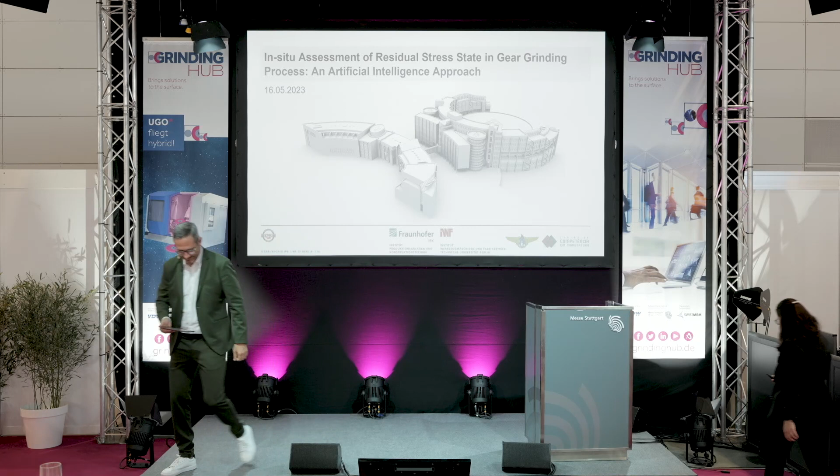Thank you very much for this opportunity. Hello everyone, my name is Carla. I'm here today to present this presentation titled In Situ Assessment of Residual Stress State in Gear Grinding Process, an Artificial Intelligence Approach.

I'm from Brazil, a research assistant there in the Aeronautical Institute of Technology. I'm here doing this research in cooperation with IWF at Technische Universität Berlin, so I'm very glad to present this topic today.

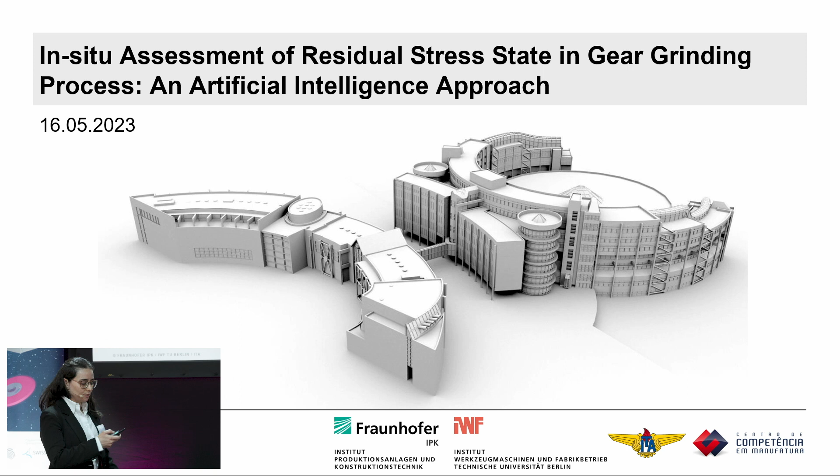This presentation will be divided into three topics. First, we will talk about the motivation of this research. Then I will explain the methodology we are using right now, and I will finish with the next steps.

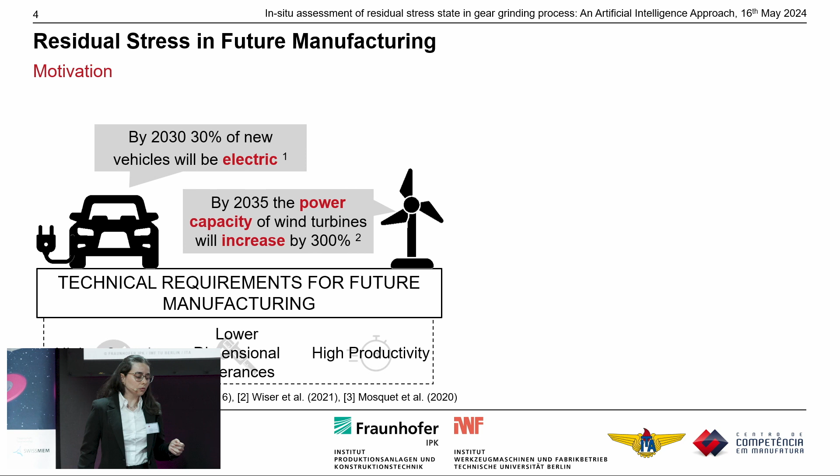This research is based on the new technical requirements we are seeing in the industry right now. We need high speeds, lower dimensional tolerances, high productivity. And this is leading to new concerns about surface, durability and reliability of mechanical components.

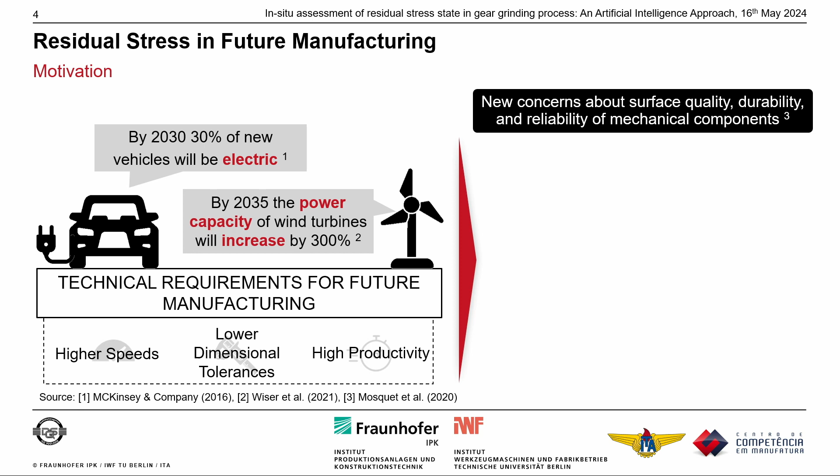My research is based on gears. When we talk about surface integrity on gears, we can highlight residual stress, because when we have different residual stress, more compressive or more tensile, it can affect the fatigue life of gears. So our idea here is using residual stress as a tool for manufacturing.

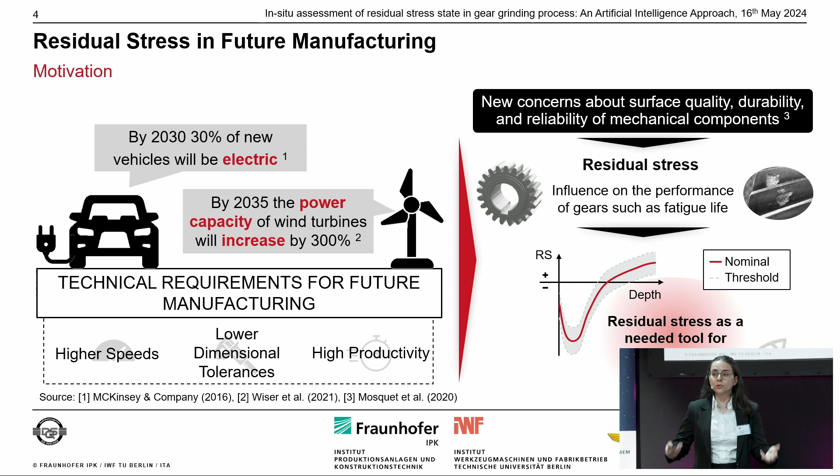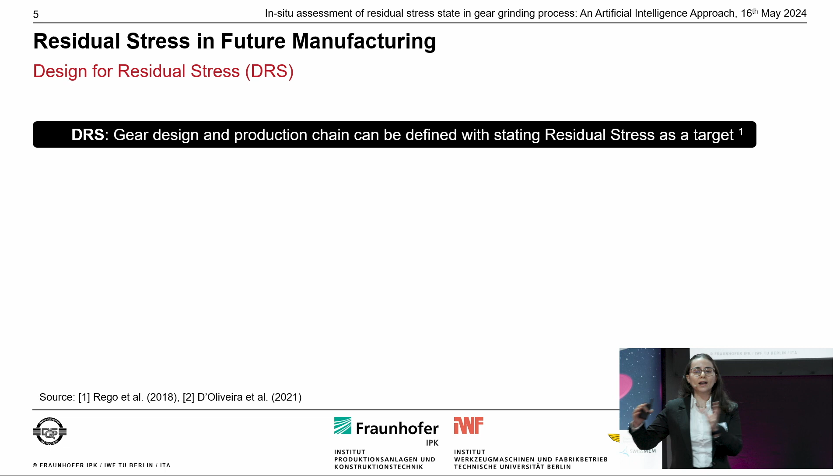This idea of using residual stress is not starting right now. It started in 2018 with this concept, named Design for Residual Stress, DRS. The idea of this concept is to design the gear and its manufacturing chain thinking about the final residual stress to enhance the fatigue life of gears.

This research started with my research group in Brazil, and they defined some major information that is important right now. The first is that the residual stress is not a product of one process only, it's a product of the whole chain. So it's important to pay attention to the residual stress at each stage of the manufacturing chain.

Also, some colleagues of mine defined some forms to predict residual stress first, because first we need to predict, then control. So we are in that moment now, how to predict that. We already have some numerical predictions working well, but they are still offline, so it's not possible to apply in industry, on the shop floor.

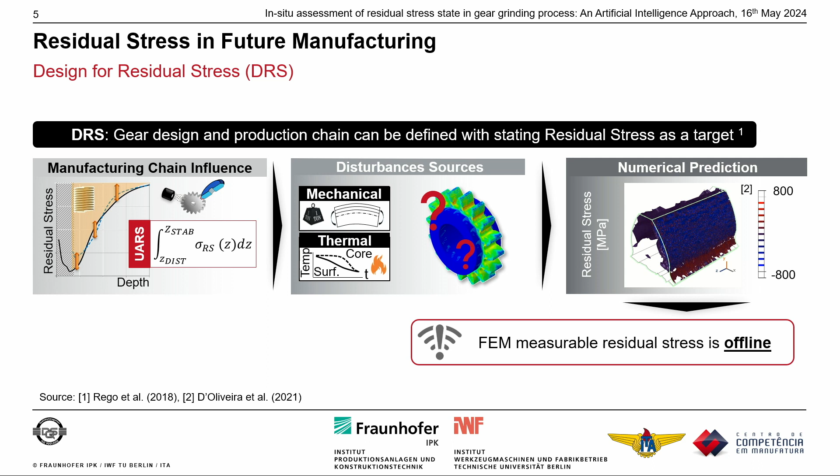So the idea of this new research we are developing together with Germany is to develop an in situ assessment of that. To do that, the first thing we have to look at is, okay, what are the ways we have right now to assess and control residual stress?

We have, for example, to assess residual stress, the X-ray diffraction technology. It's very used, but has some key challenges regarding position dependency, time consumption, and could be destructive depending on where you want to measure this residual stress. So it's not possible to be used online in a shop floor.

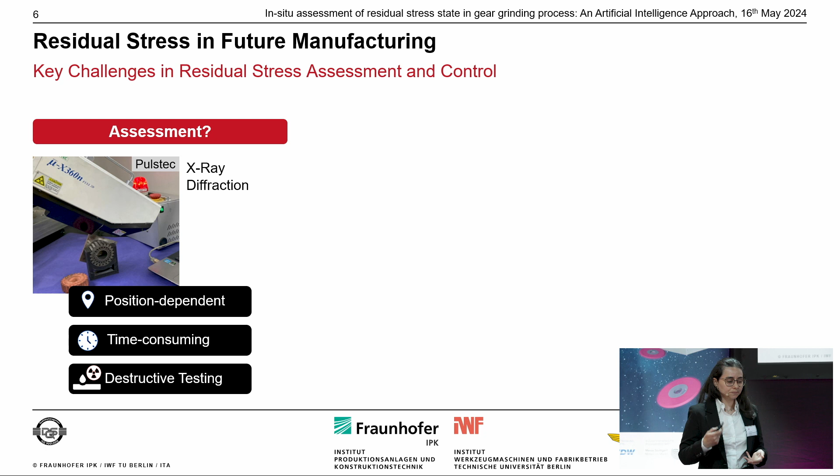Also, when we talk about control, we can use finite element models, but it's also a problem to use it online because of the time, and also because it's very limited for the boundary conditions of each model.

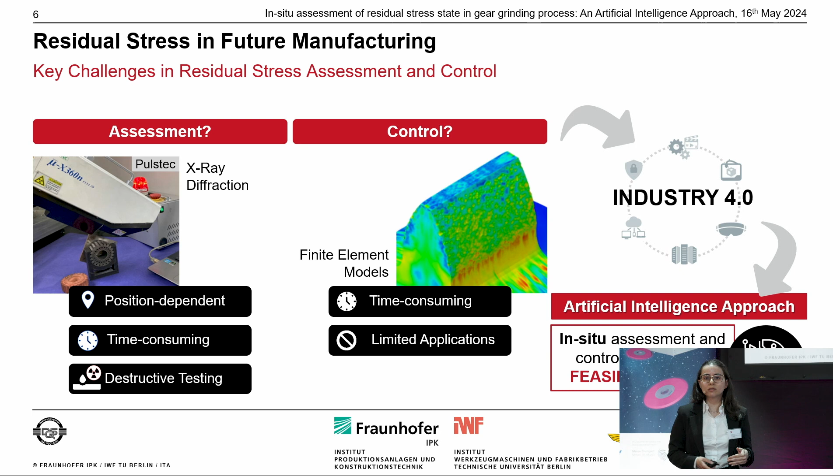So the idea now is to use new technology of Industry 4.0, for example artificial intelligence. We already researched about that, and we know it can be used for in situ assessment of other variables. So the idea now is to use that to predict residual stress in that moment.

So based on that motivation, we defined this methodology. We will apply artificial intelligence in the prediction of residual stress. The idea is to develop an in situ approach.

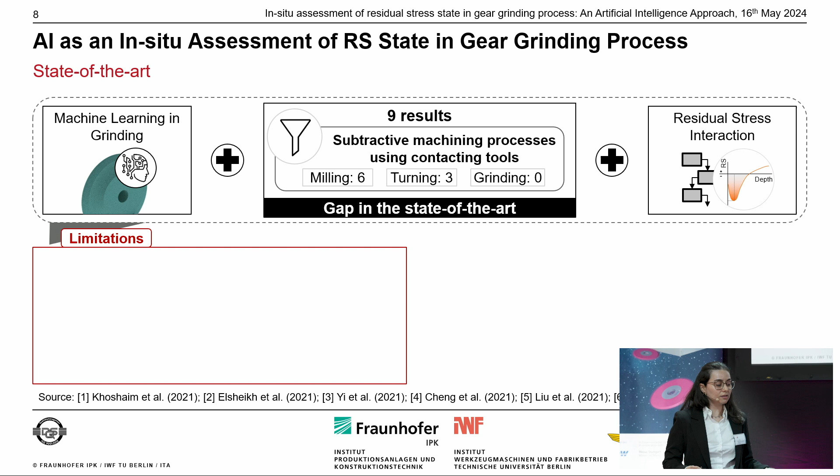So first, we started looking in the literature for what we already have about artificial intelligence in grinding. When we think about prediction of residual stress, we don't have right now any study ready. So it's a limitation we found.

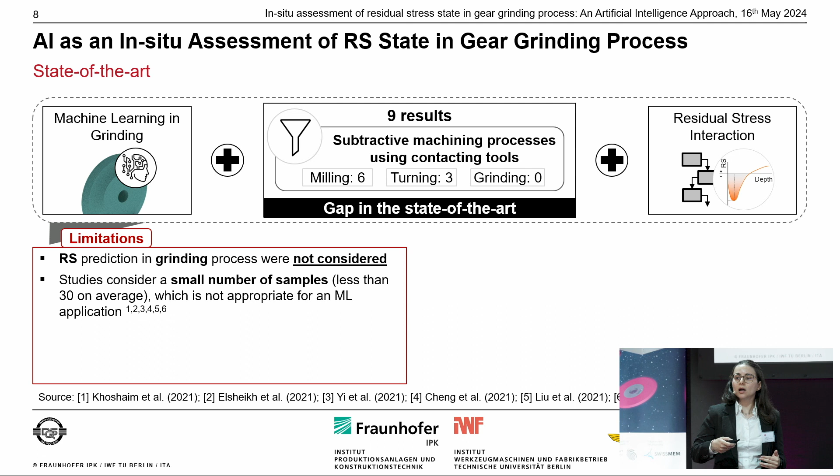So we tried to find other processes, and we found some results regarding milling and turning, but even these studies had some limitations when we think about in situ prediction.

First, they use a small number of samples, on average only 30 in the studies we found. It's not an appropriate number for machine learning application, so this is a limitation we want to fix.

The second limitation is that only one of these studies considers online process loading, which is very important for online applications. And finally, none of these studies consider the interaction—in other words, none of them consider the whole manufacturing chain or more than one pass, for example, in each process.

So now our contribution here will be focused on developing this online prediction algorithm using machine learning, and then considering this influence in the manufacturing chain.

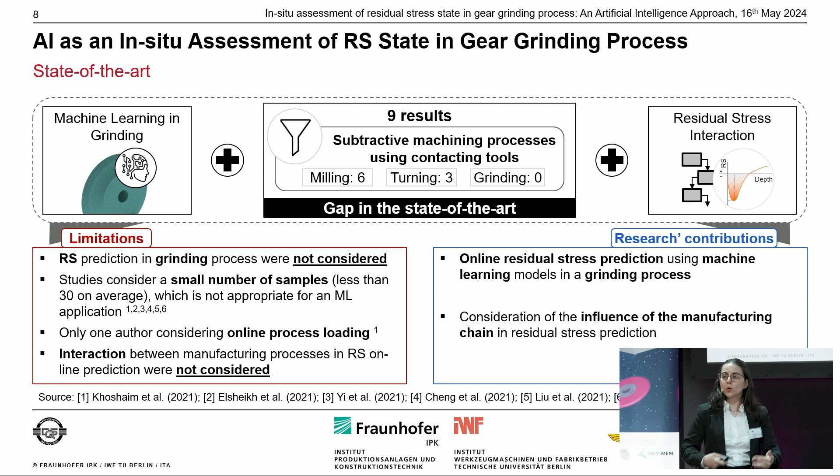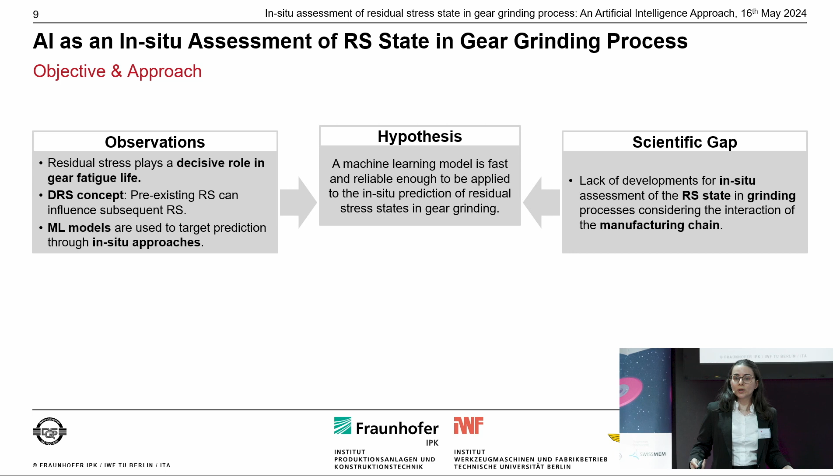Looking at all these observations and paying attention to that scientific gap, we state the hypothesis that a machine learning model can be able to predict the residual stress in the shop floor, and then we define the objective of our research: to develop and evaluate a machine learning framework to support this in situ assessment of residual stress state in gear grinding.

So you can see we chose this gear process to apply our research, because gear grinding in this case will be the last process in the manufacturing chain, so it will be possible to evaluate all the influences we will have from the other manufacturing processes in the chain.

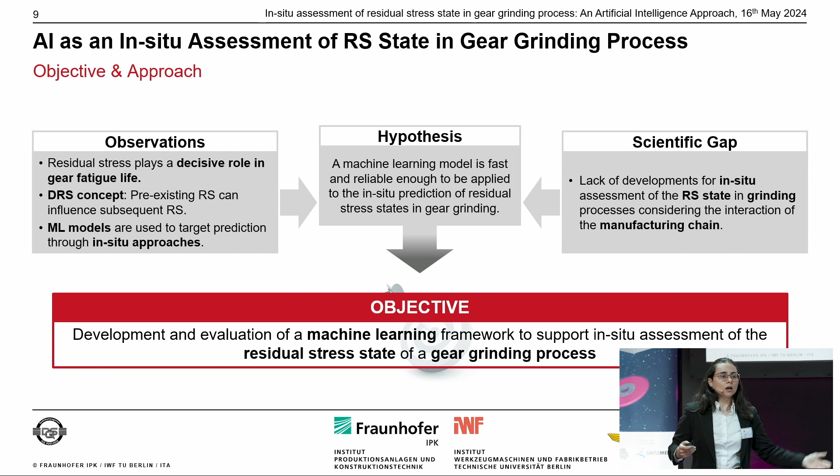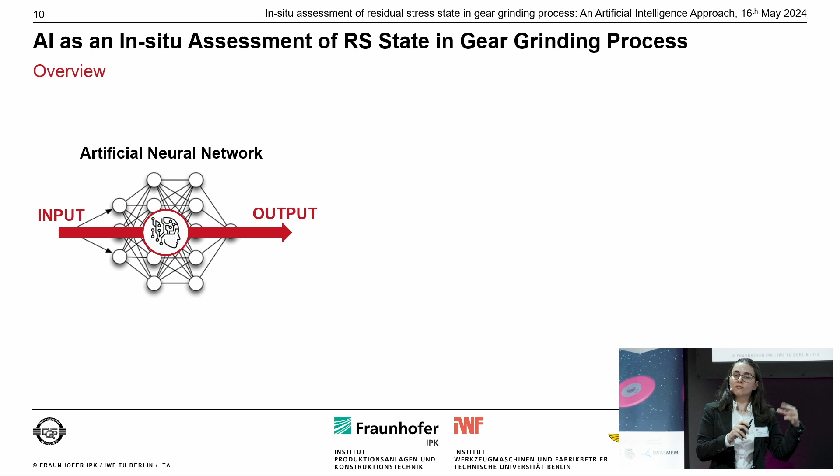So how will it work? We will use an artificial neural network to apply this. This will be the algorithm we choose, and we have to develop a database with input and output data to train this algorithm.

So we are working together with Berlin, with IWF, and we are developing a design of experiments with a lot of samples to change the process parameters. The idea is to create a lot of different residual stress states and then create a database that we can use to train that algorithm.

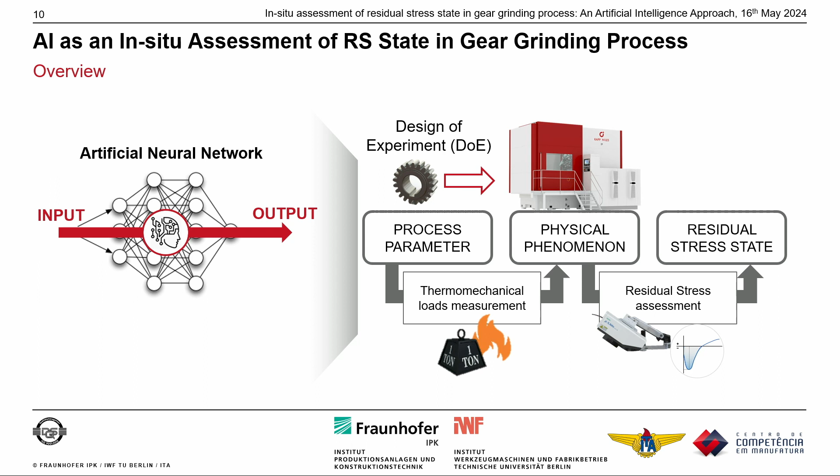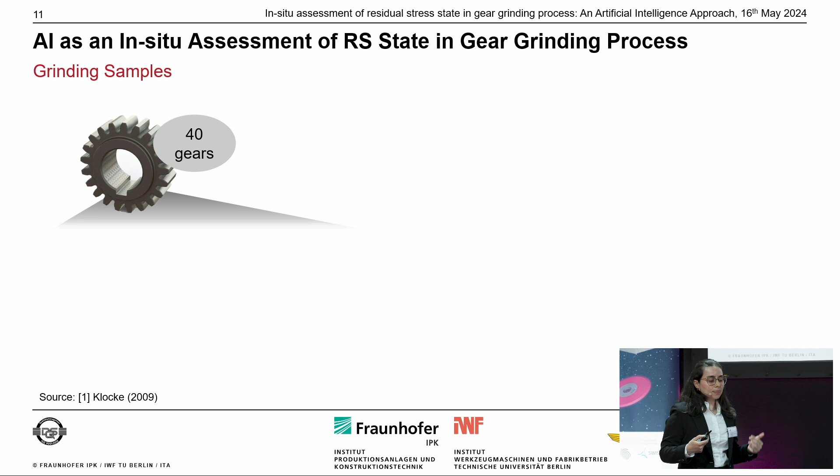So about how we will do these experiments: we will use 40 gears in the first moment, and we are doing a pre-grinding first because these gears were heat-treated, so we need to reduce the heat treatment geometry deviations.

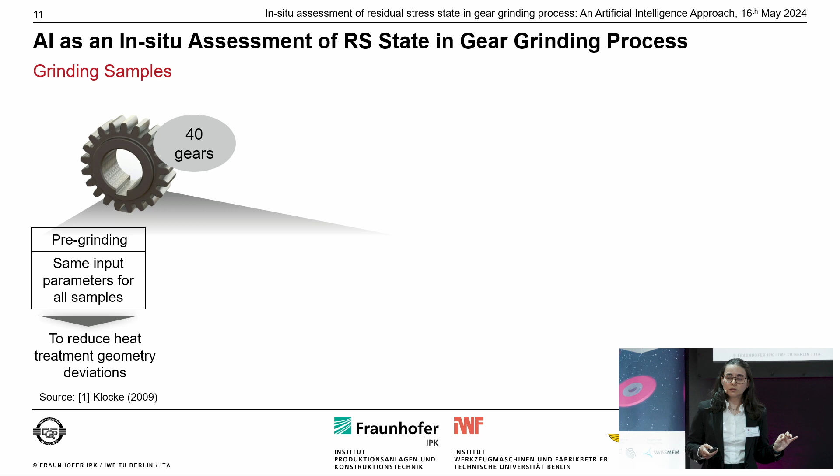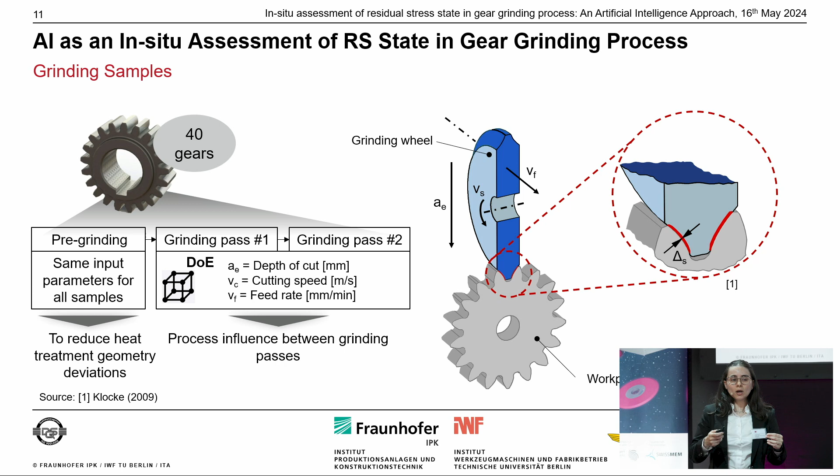And then we will do this DOE with 2 grinding passes, because our idea is to try to identify how one grinding pass will influence the other grinding pass. That's our idea, to understand the process influence between grinding passes and this influence of manufacturing in this first research.

And also, in each grinding, we will split each gear into 7 sectors. One will be the control group, and the other 6 we will use with different combinations of process parameters, so we can have a greater database, which is very important for machine learning applications.

Our idea is to reach more or less 200 experimental samples in this first research, which is not a huge number, but comparing with other research we have right now, it's an interesting number.

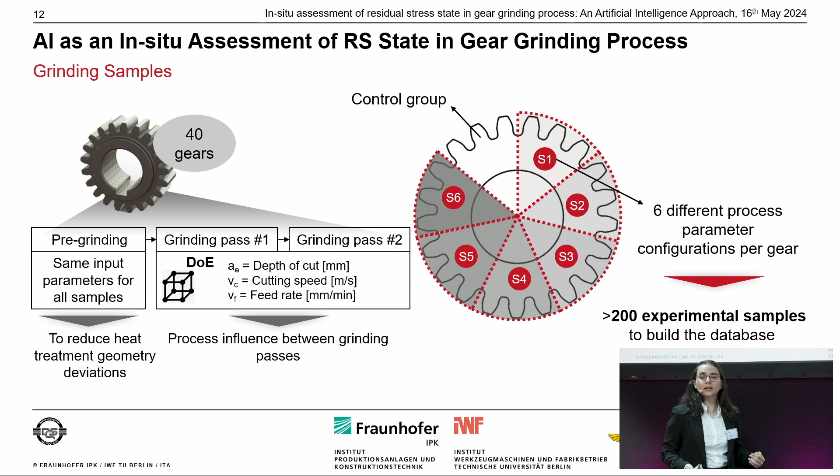Regarding the instrumentation, our idea here is to make this instrumentation as less invasive as possible, because our idea is, in the near future, to try to implement that in a shop floor.

So thinking about that, we will use data from a machine-integrated force measurement that we already have there in IWF in Berlin. They have a Kapp Niles ZP12 machine that we will use for the experiments, and we also will collect machine information from the interface of this machine. So our idea here is to facilitate this instrumentation for the future.

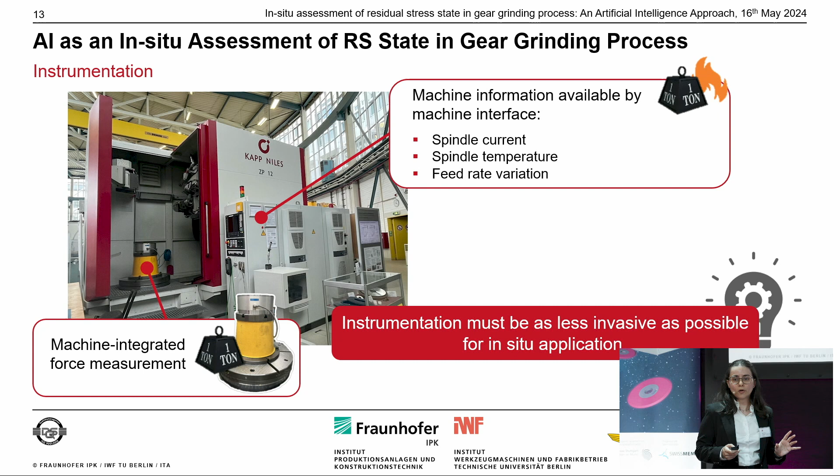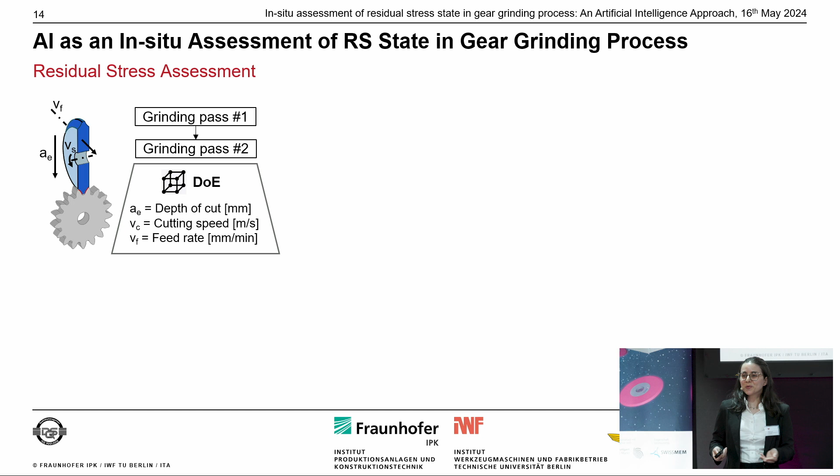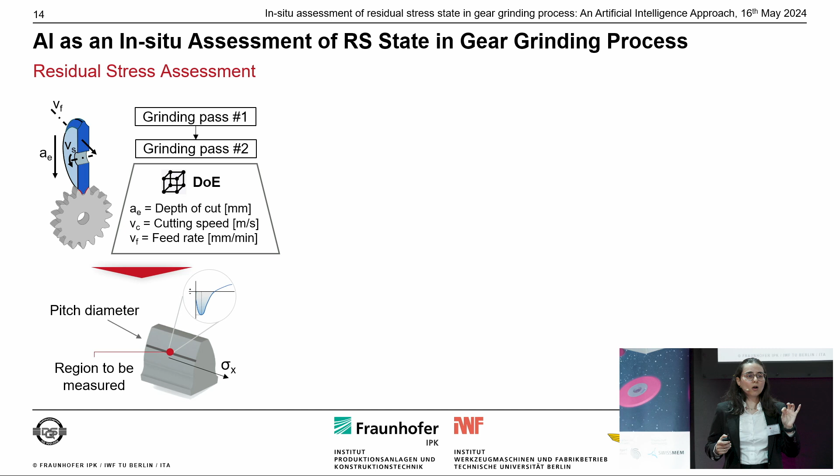About the residual stress assessment, after all the samples were ground, which we are doing right now, the idea is to cut each tooth of the gear, because we need to assess the residual stress in the pitch diameter of each tooth. We will have a partnership with Brazil, the university I come from, where they have X-ray diffraction equipment to measure the residual stress of all samples.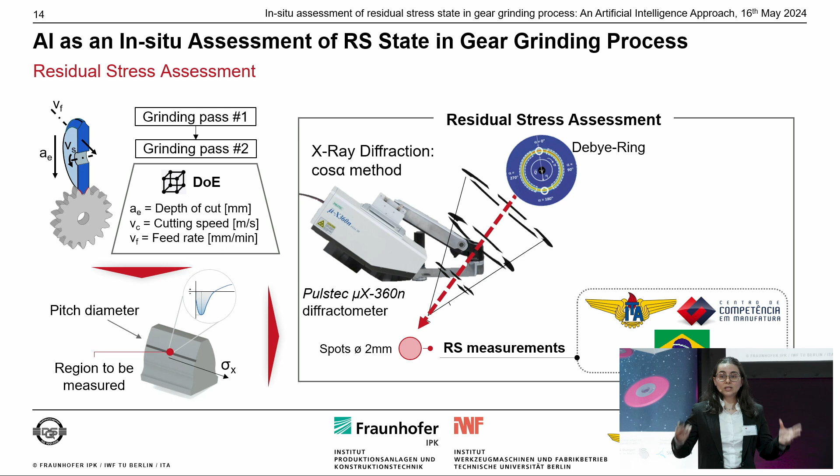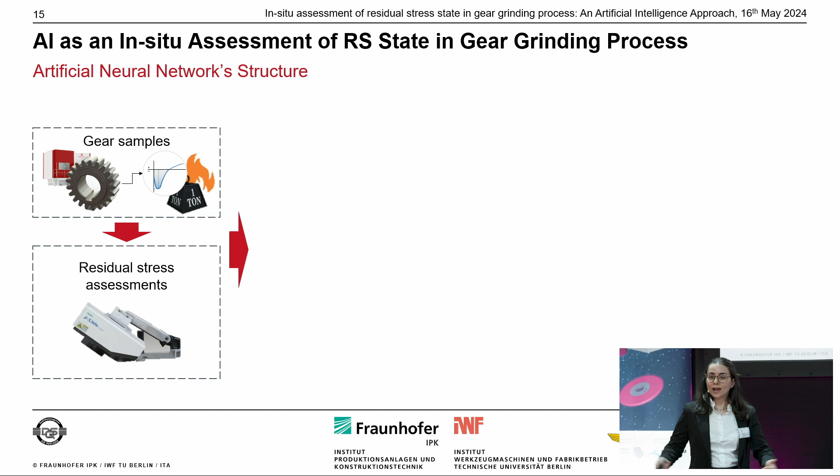That will be used as an output of our model in the training phase. So how will the artificial neural network work here? First, we will have the gear samples and do the grinding experiments. Then we will measure the residual stress, and then we have to treat all this data. It's important to do this phase of treatment, cleaning the data, and pay attention in the analysis phase, because we have to understand if this data is okay to be an input of our model. So we'll do some data analytics analysis, and then we will store it.

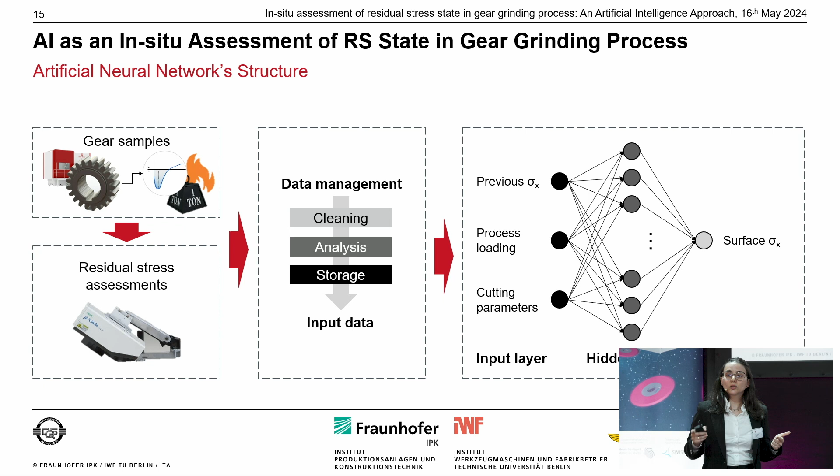Then we will have our database, and we will use this database in an input layer and an output layer. The input will consider the previous residual stress, because we are considering the influence between grinding passes. We will put in the process loading that we are collecting during our experiments, and we are also using the cutting parameters, which is easy information to obtain. The output of the model is the surface residual stress in the pitch diameter, which is the variable we are trying to predict.

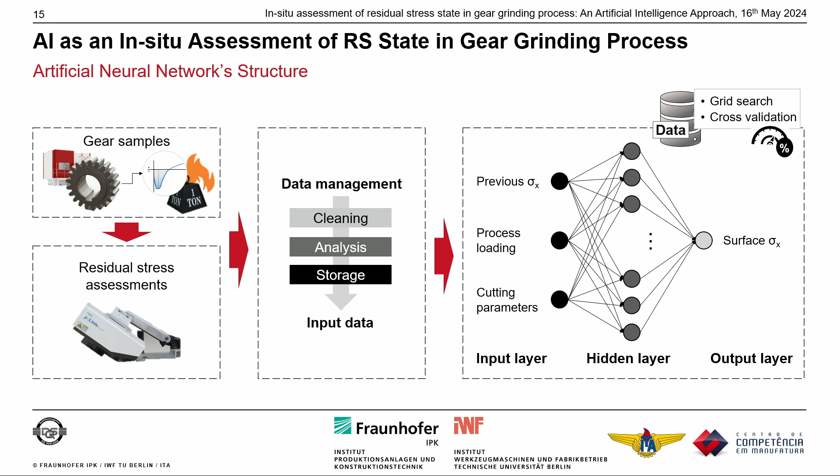So we will do the training of this model, and the idea is that after the training, it will be able to see new data and predict the residual stress. We will also use some machine learning techniques like grid search and cross-validation, trying to enhance the results, because we don't have a lot of data, and data is very important for machine learning. So we will also use these techniques.

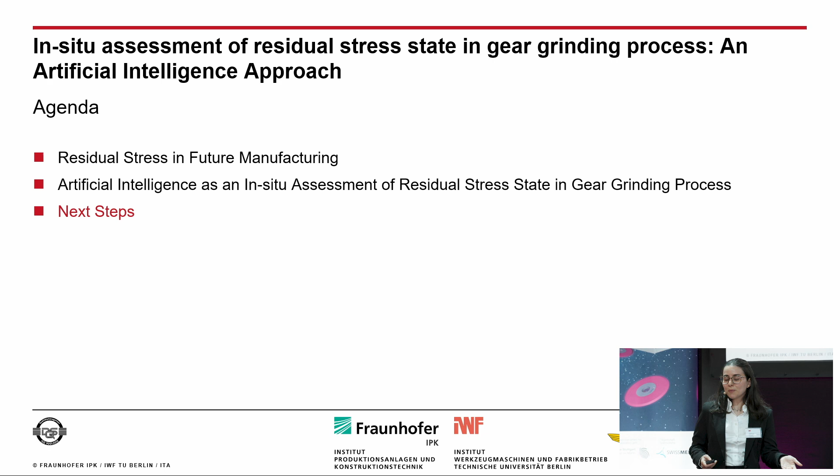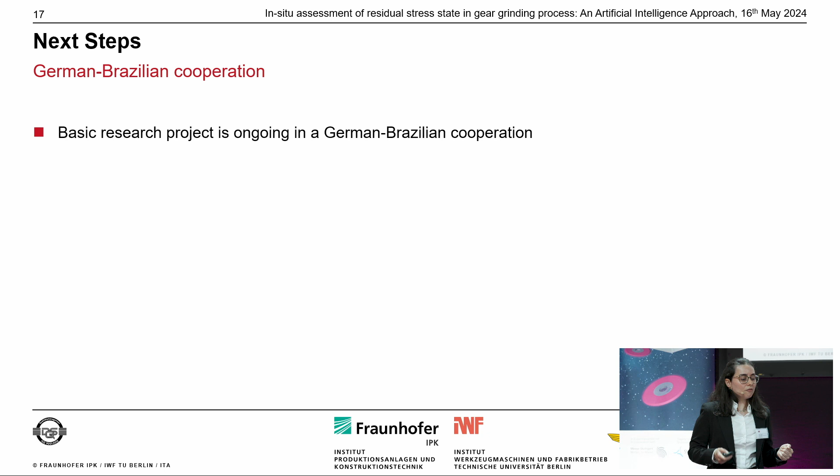This is our methodology that we are applying right now. This research is not ready, but we have some next steps to show you. First, this is basic research being developed in cooperation with Brazil and Germany. But we have next steps regarding a bigger research project on this theme that we already submitted for funding in a binational collaboration. We already have some industry support, but of course we need more. Our idea is to enhance the investigations.

For example, in the part of digitalization process monitoring, we have three institutions on board of this project. Fraunhofer IPK from Berlin focuses on digitalization to find more ways to get this data. We have IWF Berlin helping us with the knowledge of the grinding process. And we also have the Aeronautics Institute of Technology from Brazil, focused on artificial intelligence, which is my field, and also the residual stress.

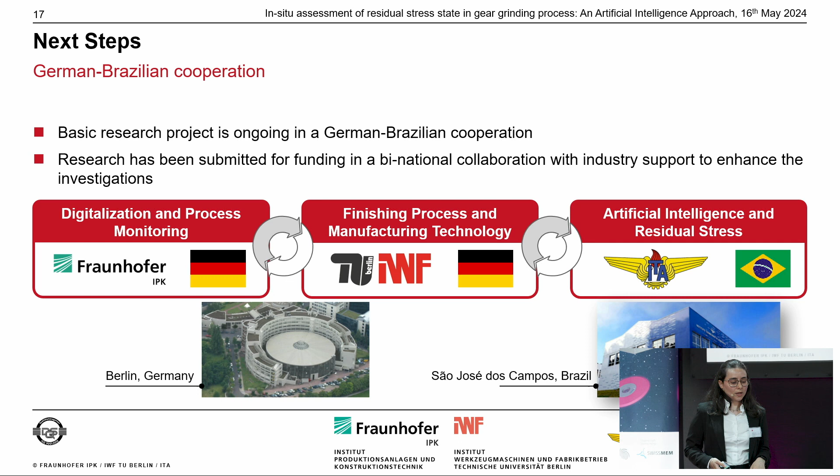Carla, thank you so much for the excellent presentation. Exciting topic. Before I start asking a few questions, I'd like to ask the audience, are there any questions from the audience? Now would be the perfect moment to ask them. If not, I'll start, and then you can follow.

Carla, usually you have to do X-ray diffraction afterwards in order to assess the residual stress. Is that something we can get rid of in the future then? Sorry, can you repeat that? We can get rid of in the future. Yes, yes, yeah.

The idea of this kind of algorithm is you have to first train it. So I have to present the information to the algorithm. So the idea is, after a lot of training, because of that I need a lot of samples, it will work without this output. This output is just a way to say, oh, it is right, it is not right, and then it will learn. So the idea is, in the future, it won't be necessary to use the X-ray diffraction every time, because it's not feasible for production, to measure every sample. So that's the idea, not to use that in the future.